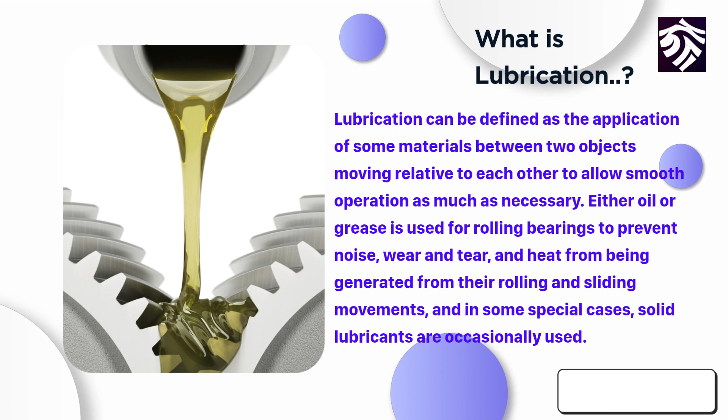Let's start with proper definition of lubrication. Lubrication can be defined as the application of some materials between two objects moving relative to each other to allow smooth operation, as much as necessary. Either oil or grease is used for rolling bearings to prevent noise, wear and tear, and heat from being generated from their rolling and sliding movements, and in some special cases, solid lubricants are occasionally used.

The amounts and kinds of lubricants for rolling bearings are determined depending on operation speed, temperature, surrounding condition, and so on. Because lubricants have spent their service life or are polluted with foreign materials, they cannot serve their function well, hence they have to be periodically replaced or oiled.

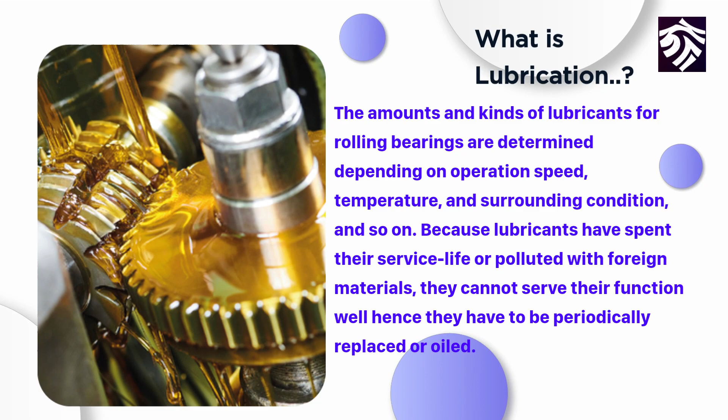Purpose of lubrication. The main purposes of lubrication are as follows. To prevent wear and premature fatigue by forming the lubrication film on the surface of load transferring parts, to prevent contacts between metals. To enhance the favorable driving characteristics, such as low noise or friction.

To prevent overheating of bearings, and to prevent lubricant deterioration by radiating the generated heat to outside. It works particularly well if the circulation lubrication method is adopted. To prevent foreign material penetration, rust, and corrosion.

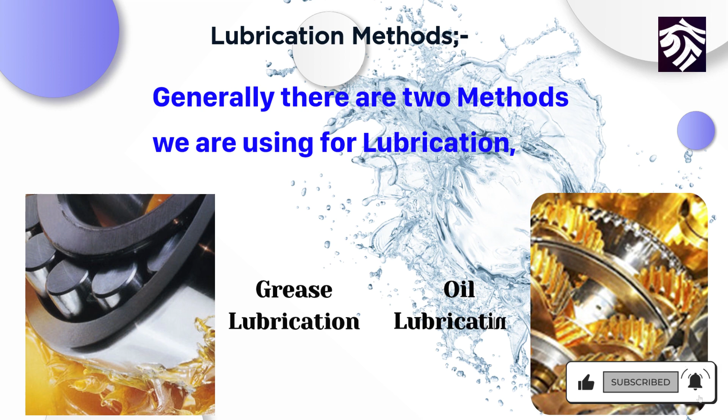Lubrication methods. Generally there are two methods we use to lubricate our machines: grease lubrication and oil lubrication. It is important to choose the appropriate lubrication method that suits bearing operating conditions and purpose for the bearing to perform well. Oil lubrication is generally better than grease lubrication in many respects, but grease lubrication is also widely used, because bearings have the available inside spaces for grease, and it is comparatively quite simple to use.

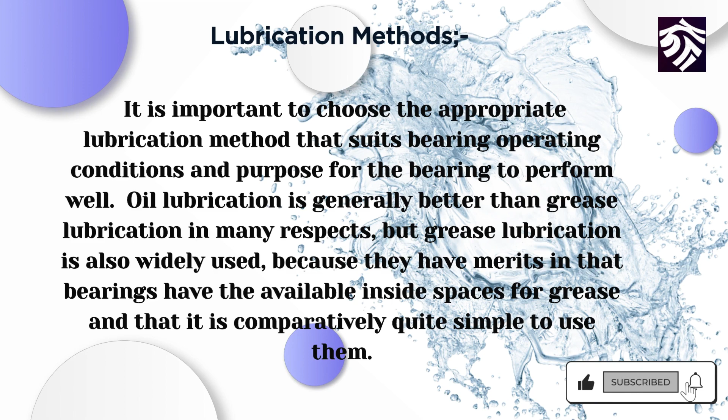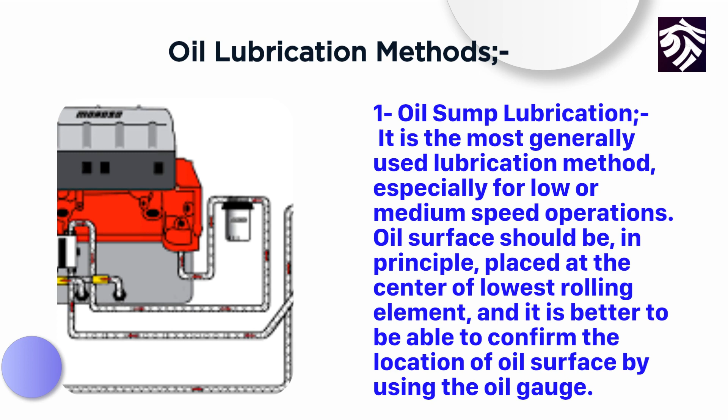Oil lubrication methods. There are several methods used for oil lubrication for the machineries. The first one is oil sump lubrication. It is the most generally used lubrication method, especially for low or medium speed operations. Oil surface should be, in principle, placed at the center of the lowest rolling element, and it is better to be able to confirm the location of oil surface by using the oil gauge.

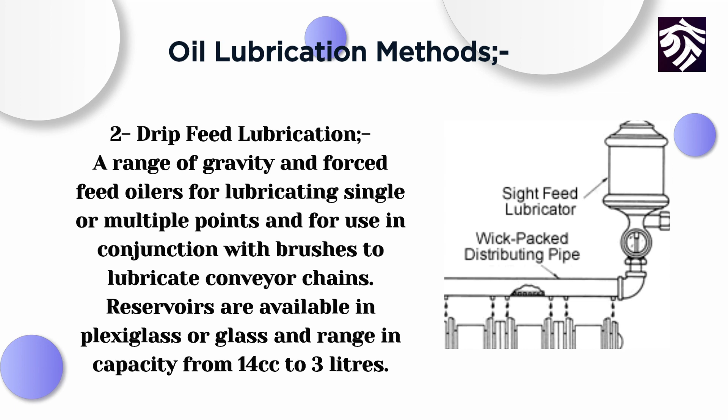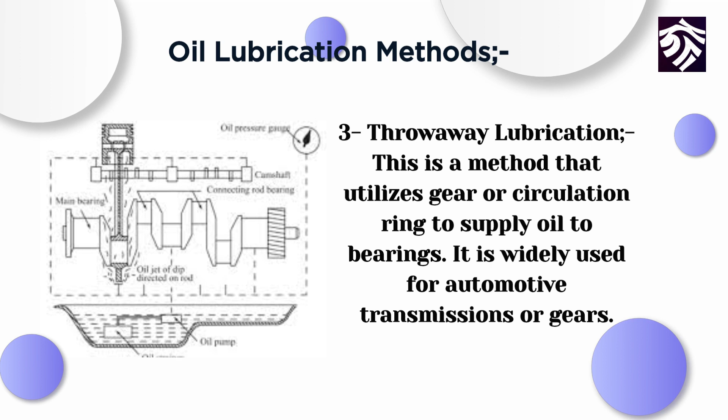The second one is drip feed lubrication. A range of gravity and forced feed oilers for lubricating single or multiple points, and for use in conjunction with brushes to lubricate conveyor chains. Reservoirs are available in plexiglass or glass and range in capacity from 14 cc to 3 liters. Throwaway lubrication. This is a method that utilizes a gear or circulation ring to supply oil to bearings. It is widely used for automotive transmissions or gears.

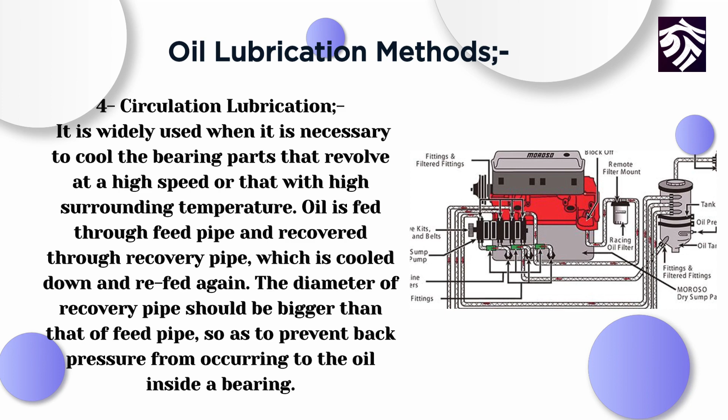Another type of lubrication method is circulation lubrication. It is widely used when it is necessary to cool bearing parts that revolve at a high speed or with high surrounding temperature. Oil is fed through a feed pipe and recovered through a recovery pipe, then cooled down and refed again. The diameter of the recovery pipe should be bigger than that of the feed pipe, so as to prevent back pressure from occurring to the oil inside a bearing.

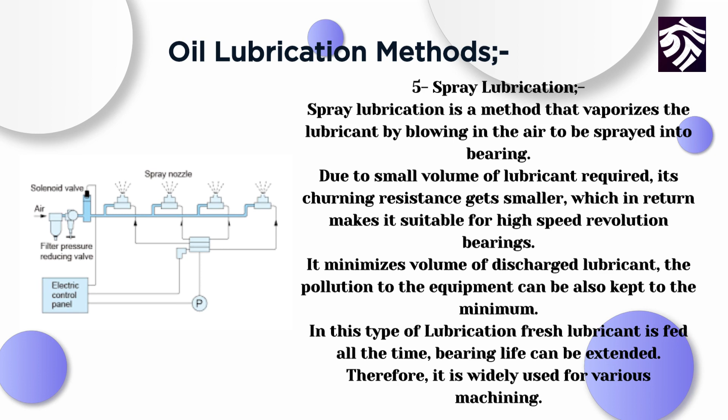Spray lubrication. Spray lubrication is a method that vaporizes the lubricant by blowing in air to be sprayed into the bearing. Due to the small volume of lubricant required, its churning resistance gets smaller, which makes it suitable for high-speed revolution bearings. It minimizes the volume of discharged lubricant. The pollution to the equipment can also be kept to the minimum. In this type of lubrication, fresh lubricant is fed all the time, so bearing life can be extended. Therefore, it is widely used for various machining.